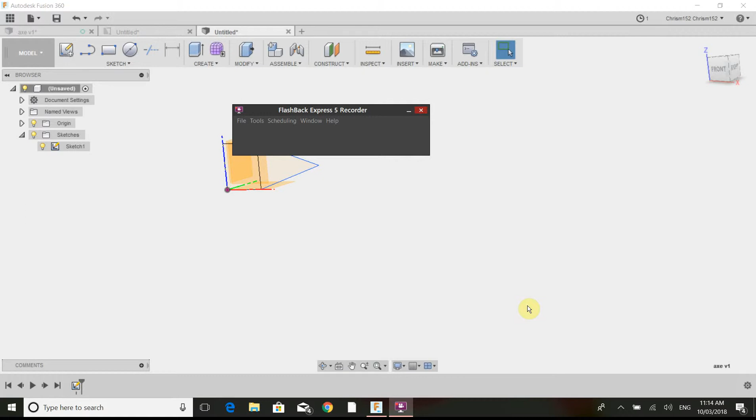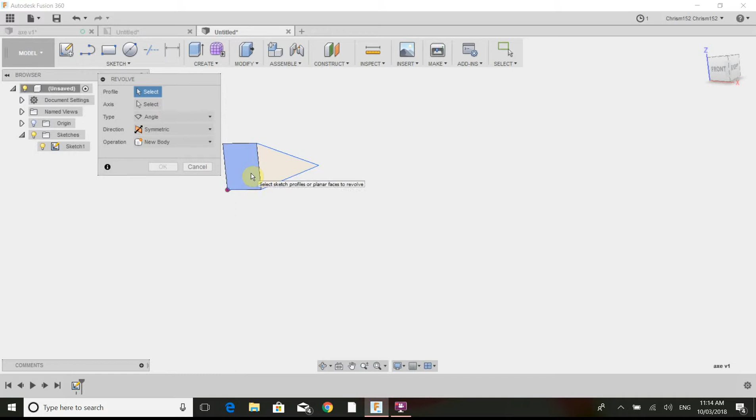Now, our learning goal here is in the create. What are some of the commands in the create? We'll turn that origin off. Create, so we have revolve, which we want to do for our battle axe. And this is the area that we want to do for our revolve. And we'll just pan that over a bit.

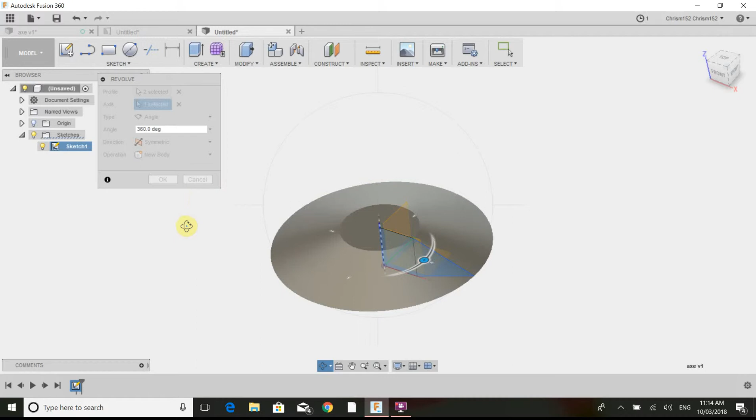Now we'll go escape. Now we'll press select for our axis. Axis is there. Just put that on orbit. Now as you see, we've got some sort of flying saucer thing there. We don't really want that. So we'll go escape from our orbit and we'll go symmetric is what we want. We'll grab this handle and we'll take it back to about 65, 70. Okay.

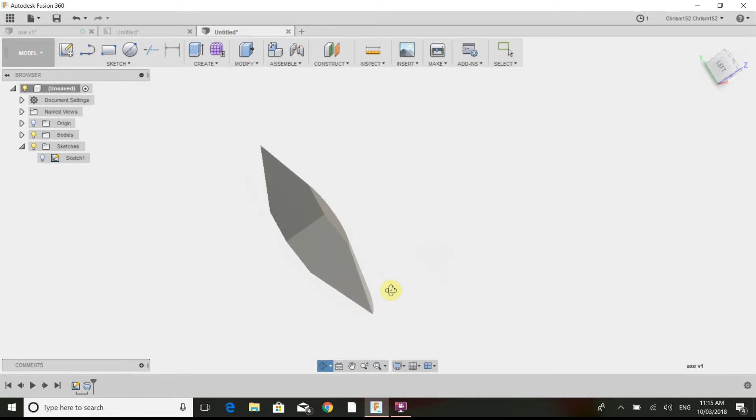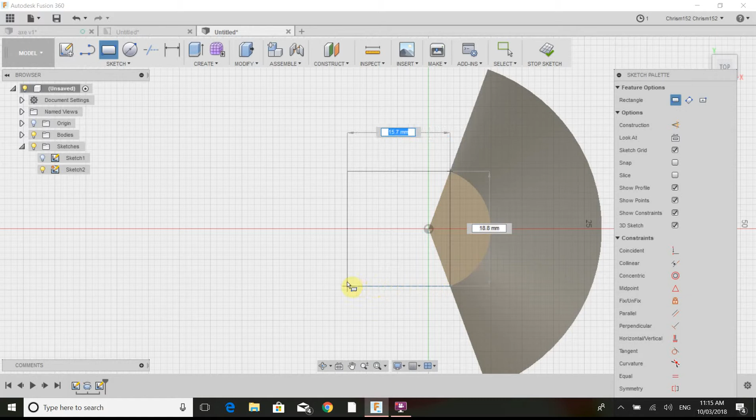And there's our revolve. But now we'll just go back to sketch for a minute. And we'll just sketch on this surface a rectangle, picking up those points. And about there, that looks so nice. Yes, stop sketch. And the other type of create that we want to look at is extrude.

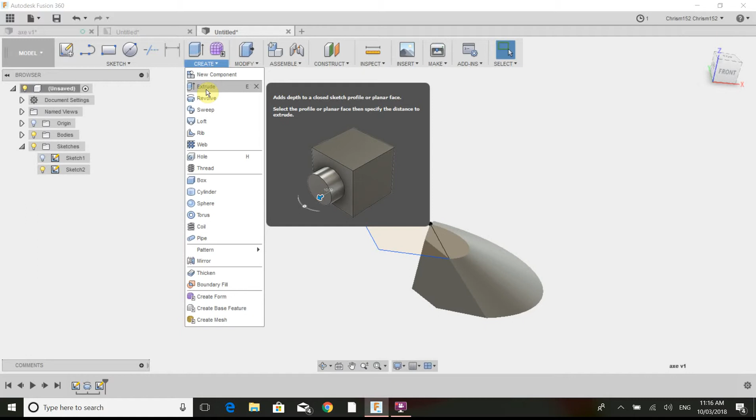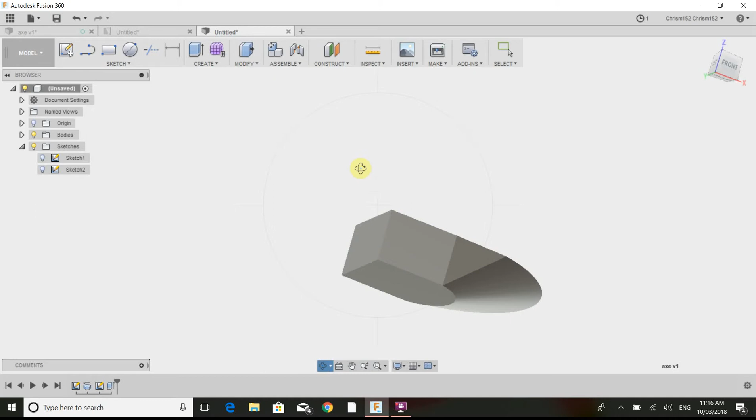Adds depth to a closed sketch profile. And we want to move this down to the base face. So we don't need to put a dimension, we can just touch the face. There we go, join. And that's creating our main block for our battle axe. While we're here, we'll put some dimension. Actually, we'll keep going. We'll do our handle.

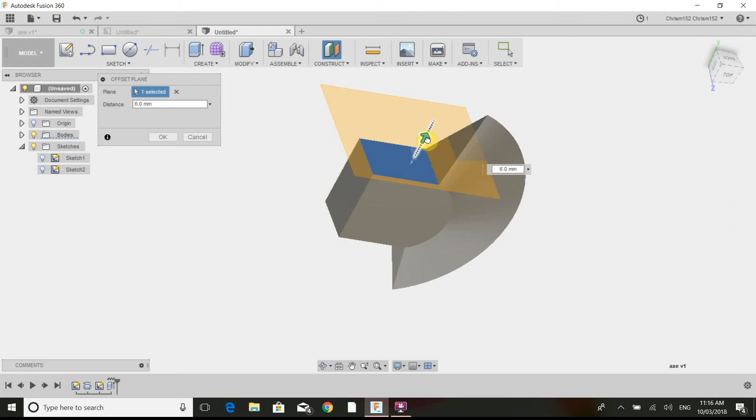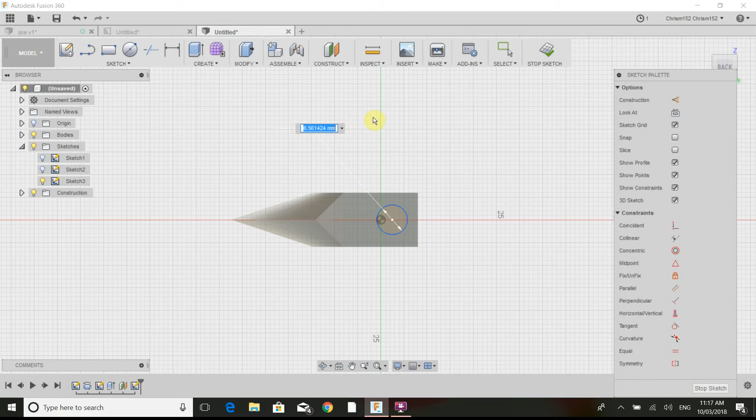In this case, we want to construct an offset plane for our top face by 6 millimeters. Okay, and now we're going to go back into our sketch, which we talked about before, and we can do our circle, which goes about there, maybe 5.8. You can dimension it and change the dimension, of course, maybe 6. Stop sketch. And then we can go to our create.

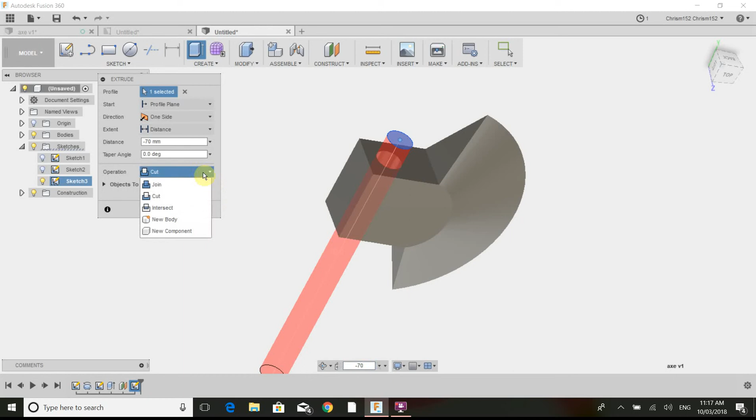We want to extrude. And we want to take that right down there to about 70. So we can take 70. Of course, it's minus 70 because we're going in the minus direction. We don't want to cut it. We want to join it. Okay. There's our basic shape for our battle axe. I think we could have our handle a lot longer. So we might increase that.

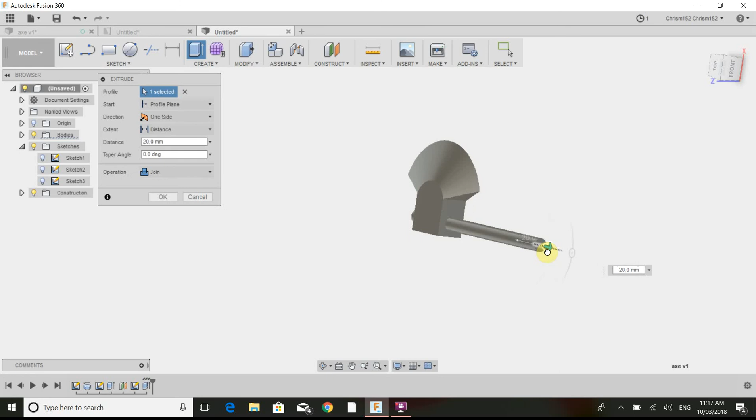So we can just go straight into create, extrude, we just touch the end and we can pull that down a bit further. Maybe another 20. That looks good. Escape from our orbit and okay.